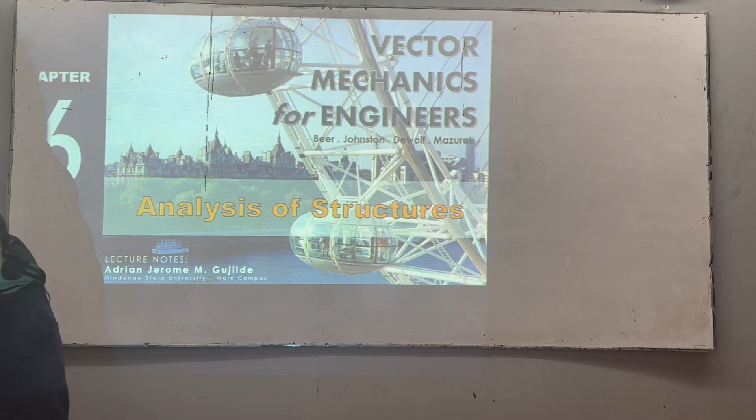So we have here analysis of structures. This is chapter 6, and for our next exam we have chapter 6 and chapter 7. This chapter is very short, with 3 topics. The content includes these sections: analysis of trusses, other truss analysis, frames, and machines. So basically this chapter is divided into 3 topics: trusses, machines, and frames.

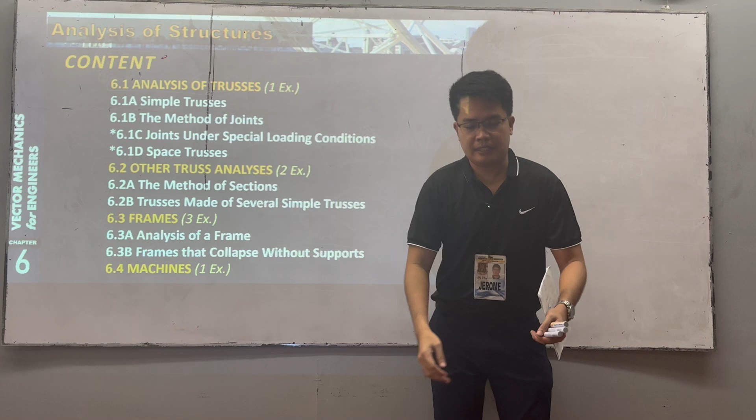For the first part, let's discuss trusses. So far, the chapters we've discussed previously only dealt with one system, which we considered as rigid, as one whole system. We didn't explode or separate it into parts. We considered it as one continuous system where we don't remove the parts.

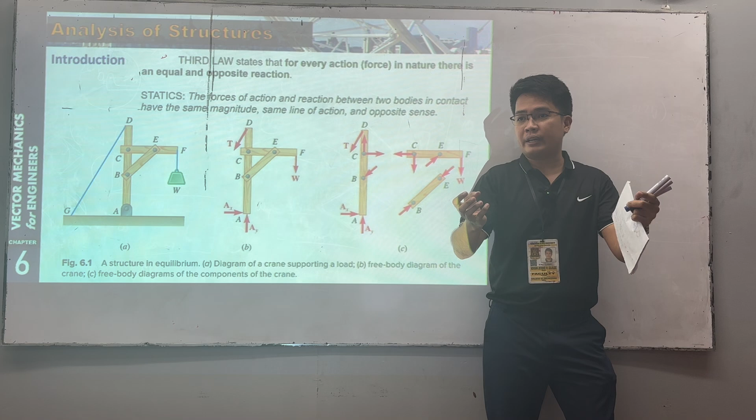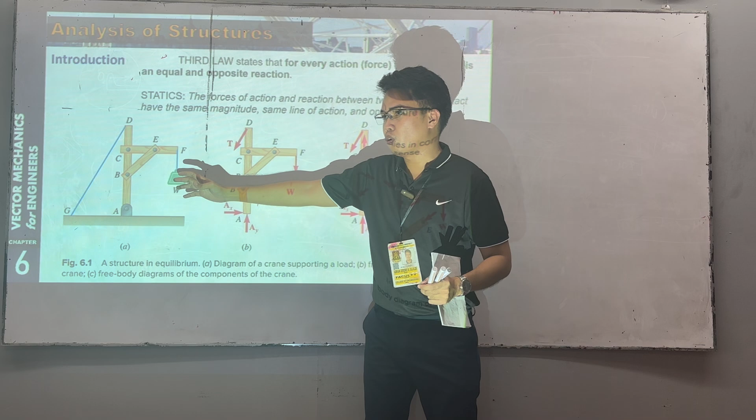For this chapter, analysis of structures, we will remove the parts of the structure. For example, in previous chapters, what we got was maybe the tension, the reactions, or the weight. But now, for analysis of structures, what we'll do is explode the structure, so the image will look like this.

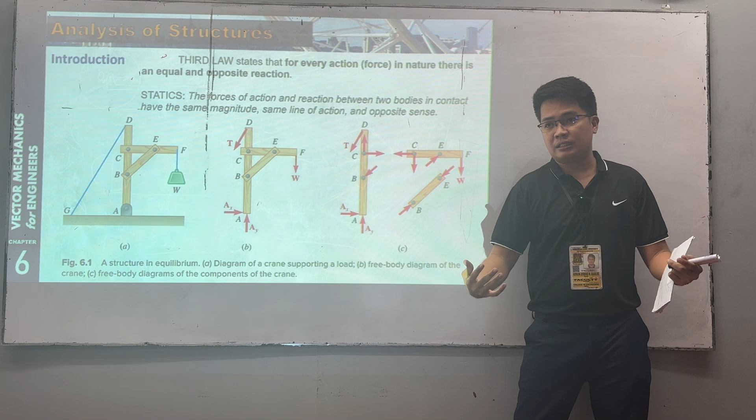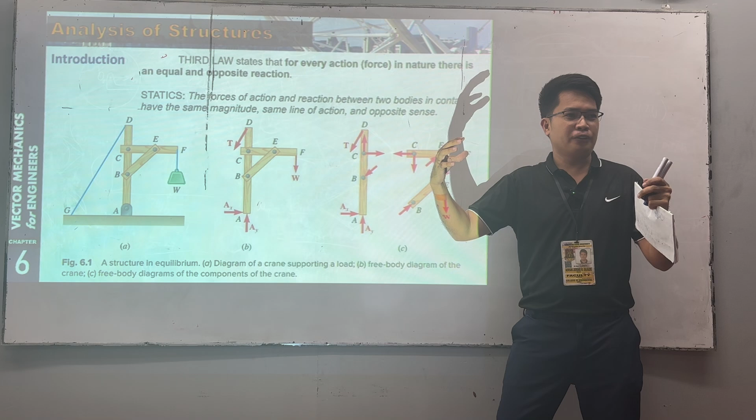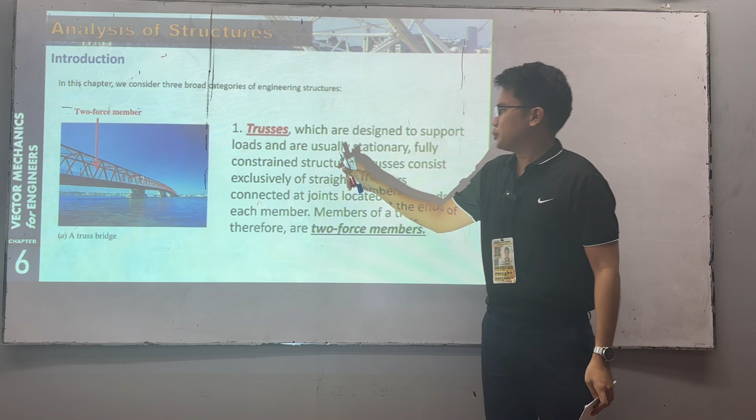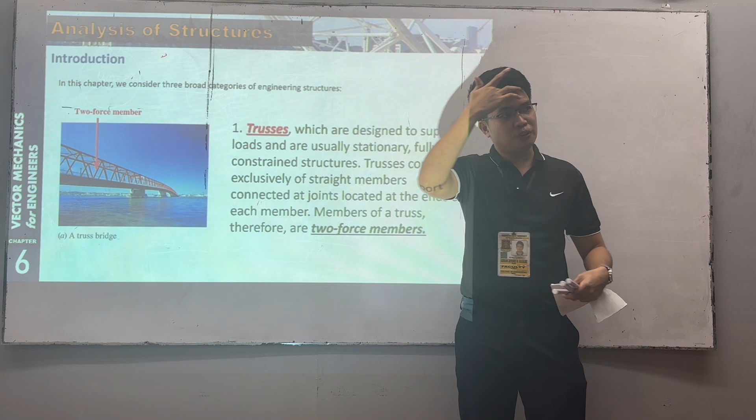We have trusses, which are designed to support loads and are usually stationary, fully constrained structures. Trusses consist exclusively of straight members connected at joints located at the ends of each member. Members of the truss, therefore, are two-force members. So our truss is a structure made of two-force members. If you remember, from before, what was our definition of a two-force member?

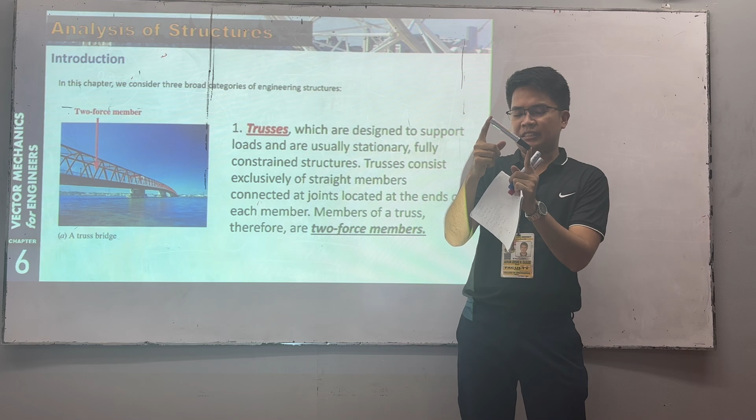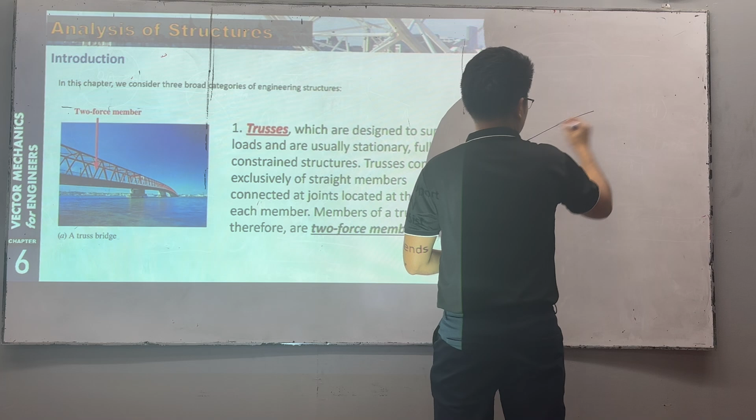A two-force member is a structure wherein only two forces are applied to it, and those forces are applied at the ends. For example, here, I placed a force going that way, and let's say another going that way. This structure is considered a two-force member because only two forces are applied to it.

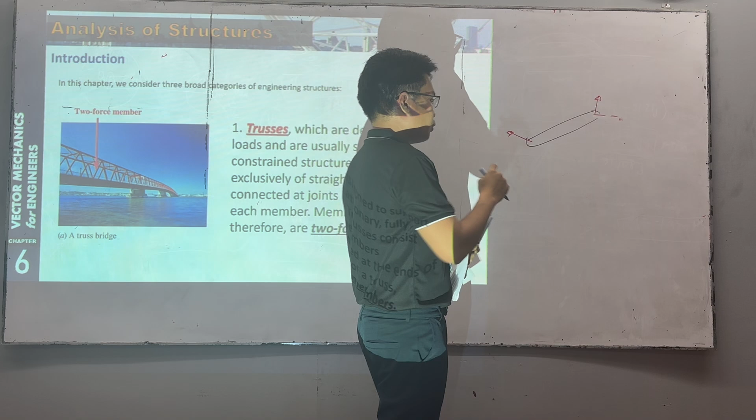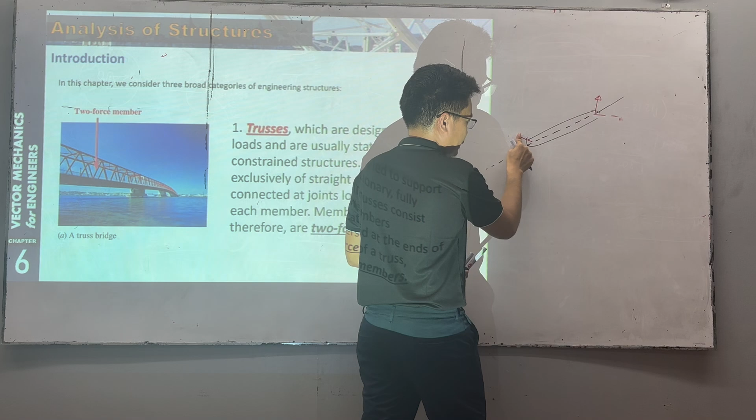The amazing thing about a two-force member is, if you have two forces applied at both ends, those forces should be opposite in direction and have the same magnitude. So this is wrong. The force applied should not be directed like this and like that. It should be this way and that way instead, the same magnitude but opposite in direction.

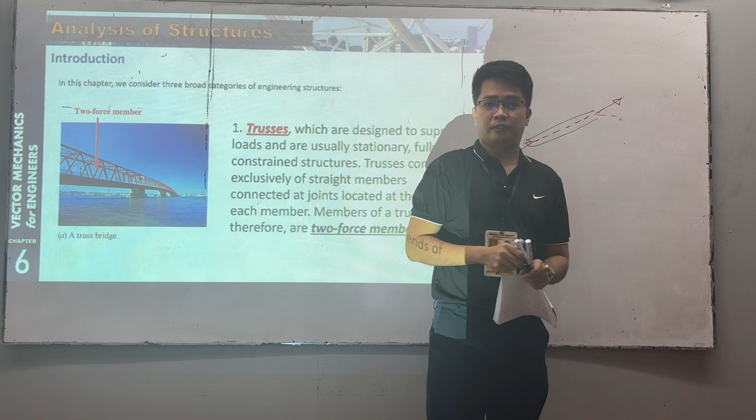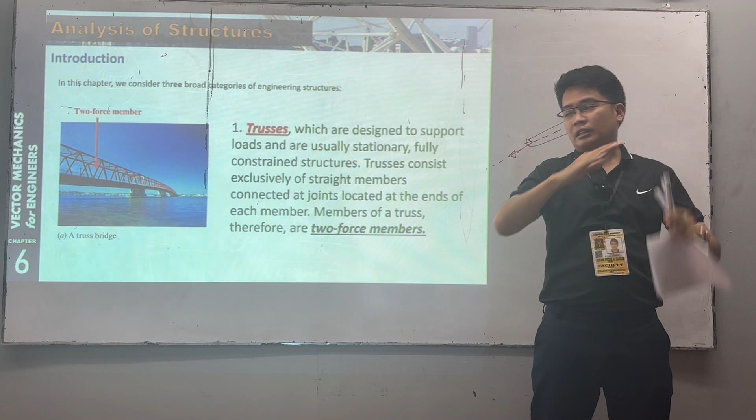So these members are what we use to create trusses. The bridges you see, the roofing you see, those are made of trusses. So again, what is a truss? A truss is a structure made of two-force members.

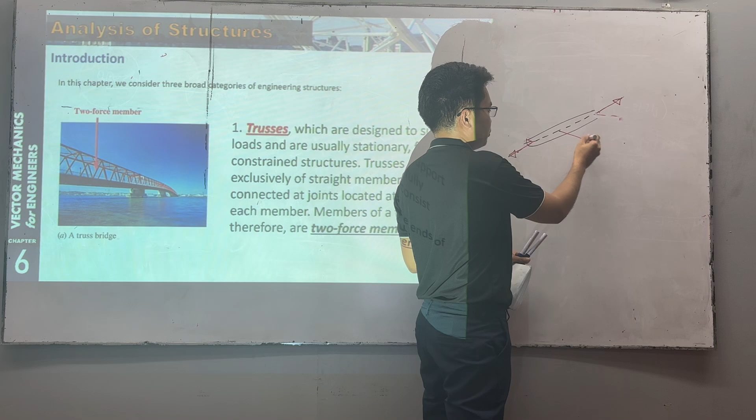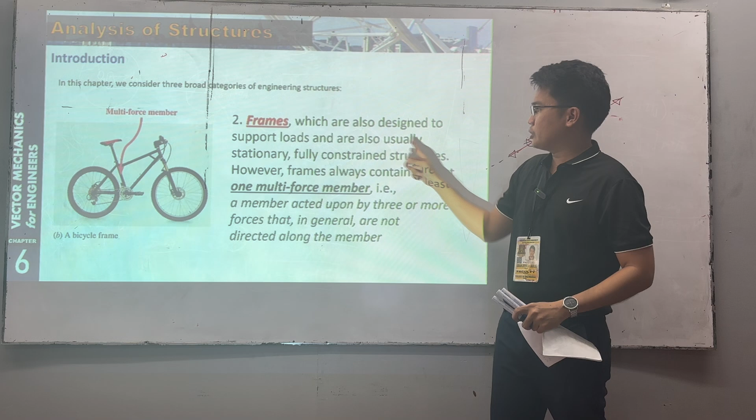Now, what if a structure has a member made of multiple forces instead of just two-force members? Let's say one member has a force applied to it like this. So what do we call that? We call that a frame. A frame is also designed to support loads and is also usually a stationary, fully constrained structure. However, frames always contain at least one multi-force member.

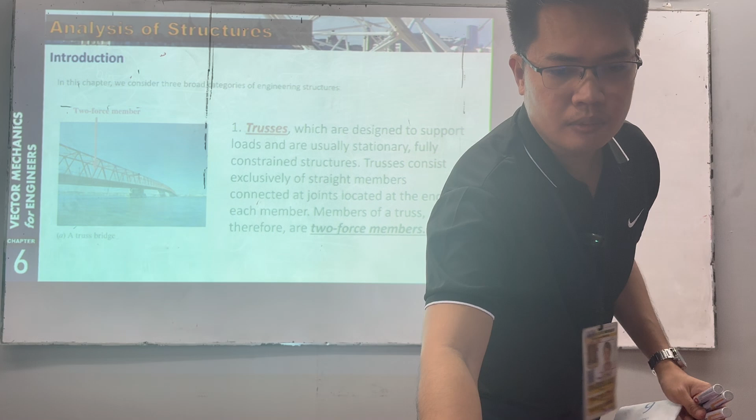For example, here, is this a frame or a truss? It's a frame, because we have a member here with a multi-force applied. So this one is a two-force member, but this one is a multi-force member. Therefore, this is a frame, and the analysis for a frame is different.

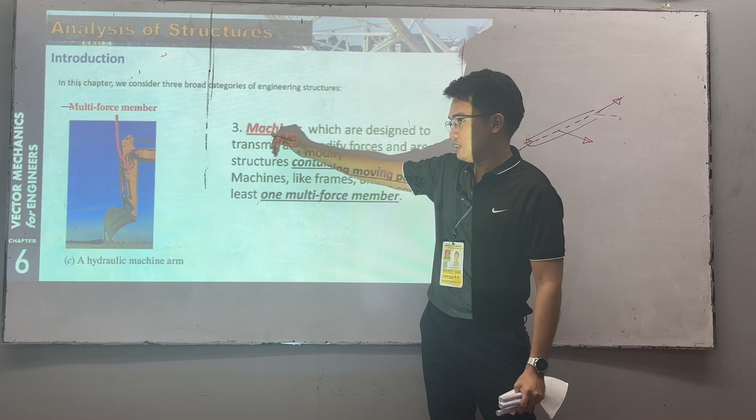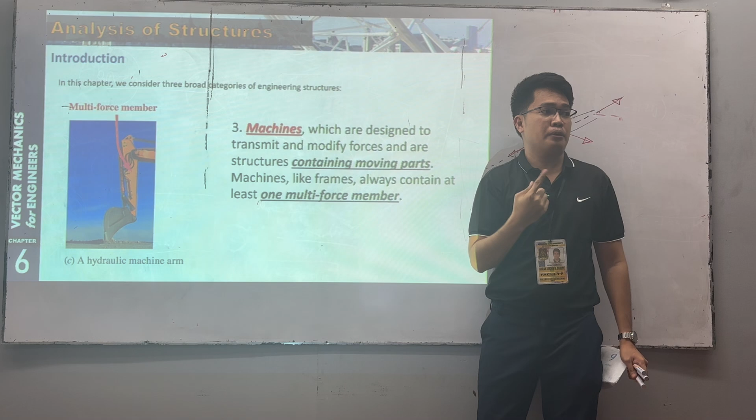Okay, so for the last part, we have machines. What's the difference between a machine and a frame? Machines and frames both have at least one multi-force member, same as a frame. But for a machine, it should be that at least one member is dynamic, or moving. Once there's a moving part, that's our machine — a simple definition of machine in our statics course.

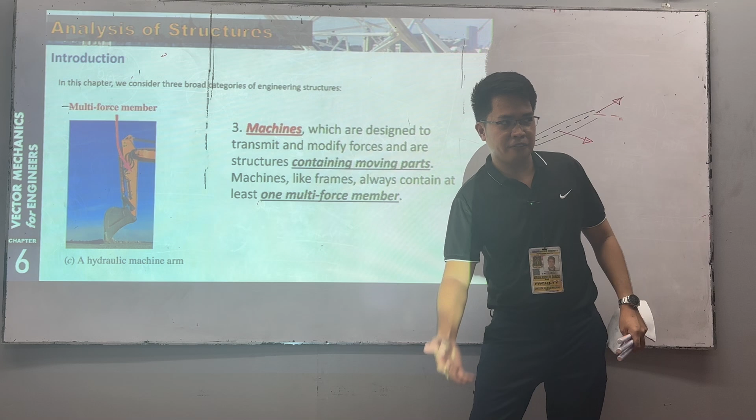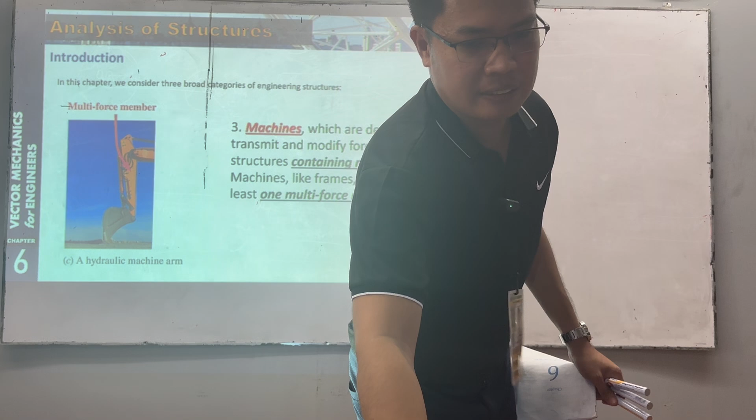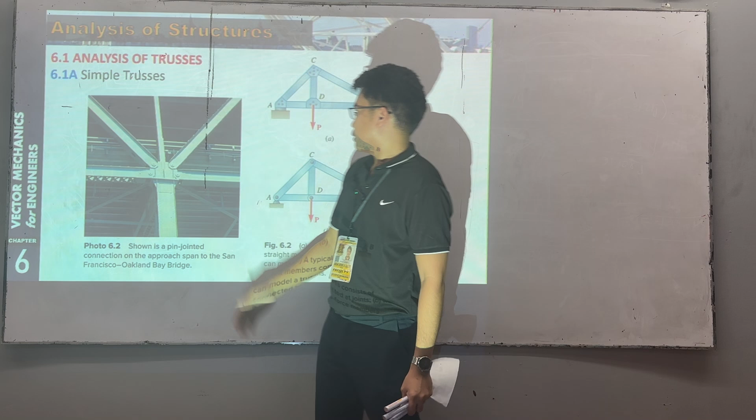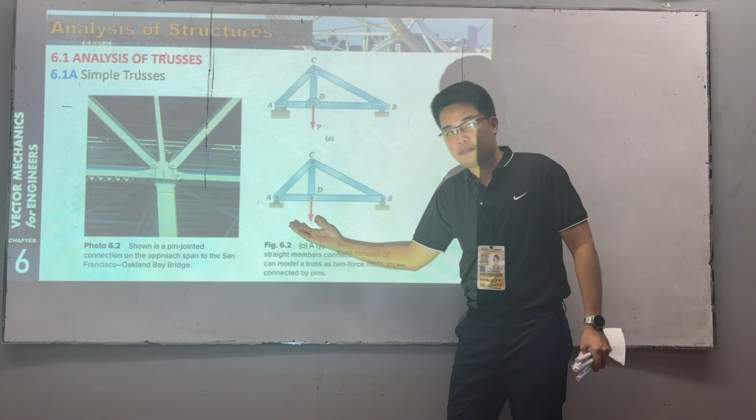One common application of trusses is our bridges. You can see in reality, these are connected by bolts or pins. If we draw this figure, we can simplify it into this one. The bolts and pins used here, we can simplify as one joint. But in ENS 164, our analysis is different. Since we're in 161, we stay with this simplified form.

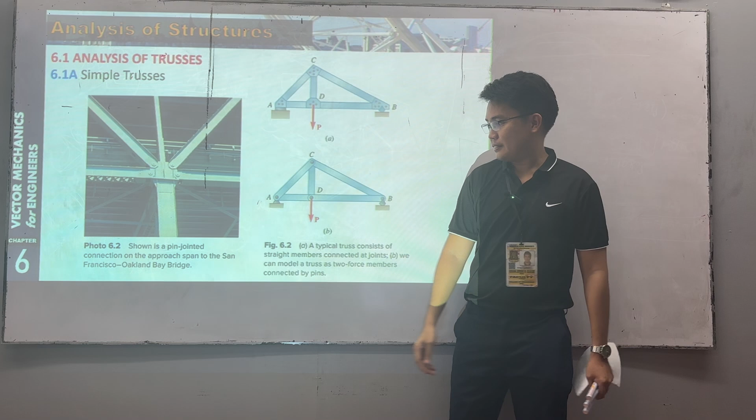So is this a frame or a truss? It's a truss, because it has no multi-force member. If this were continuous, it would be a frame, but it's not continuous, it's connected here. So it's a truss.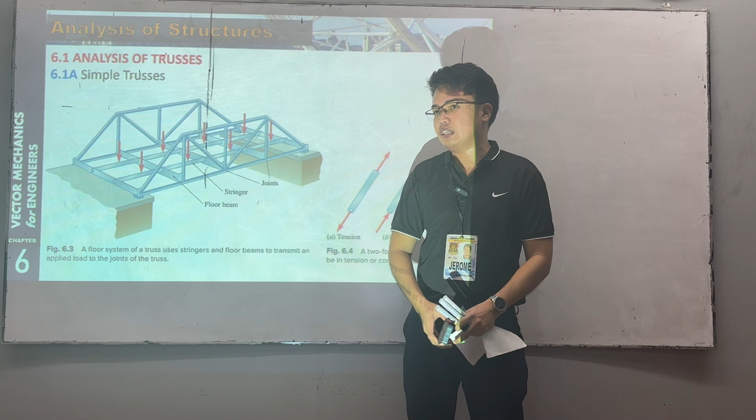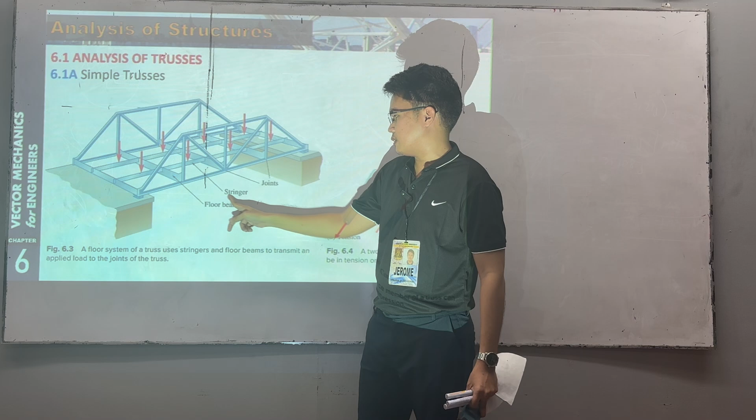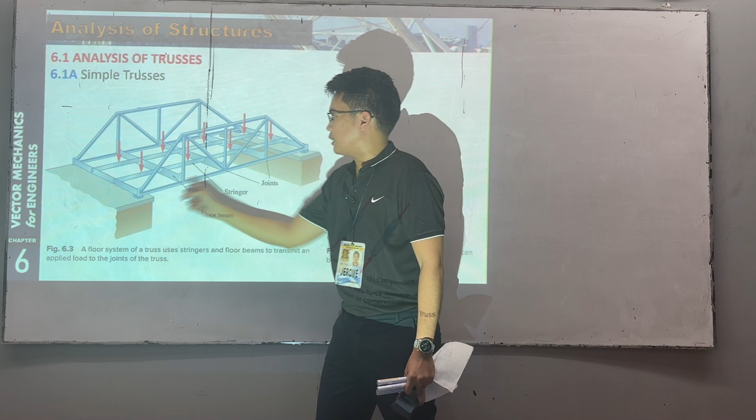For example, we have a bridge here, or a flooring. In the flooring, our trusses are on the sides, and in between we have floor beams and stringers. Their purpose is to distribute the forces and transfer them to the joints of the trusses. Once transferred, we can analyze the trusses to see if they will fail or not.

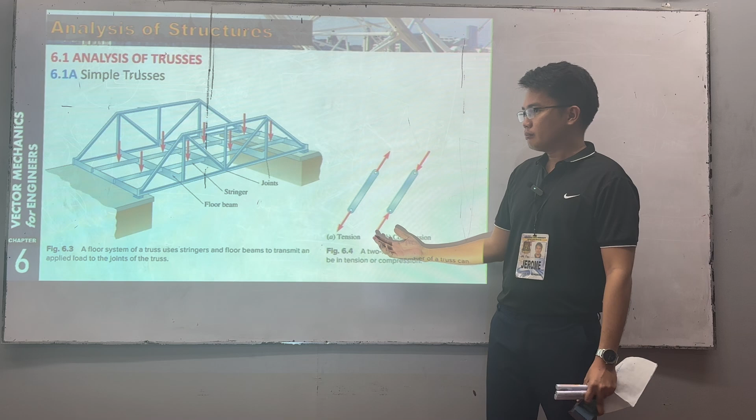Now, our convention here: for a two-force member, if the member is in tension, meaning it stretches, the direction of the force is away from the joint. If it's in compression, the force points toward the joint. That's just our convention.

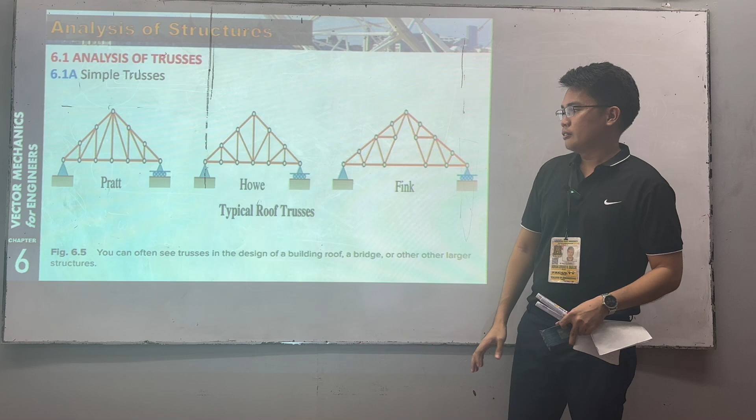Now we have these examples, applications of trusses. One is for roof trusses - we have a Pratt, a Howe, and a Fink. In our houses, these are the structures we typically use for roof trusses.

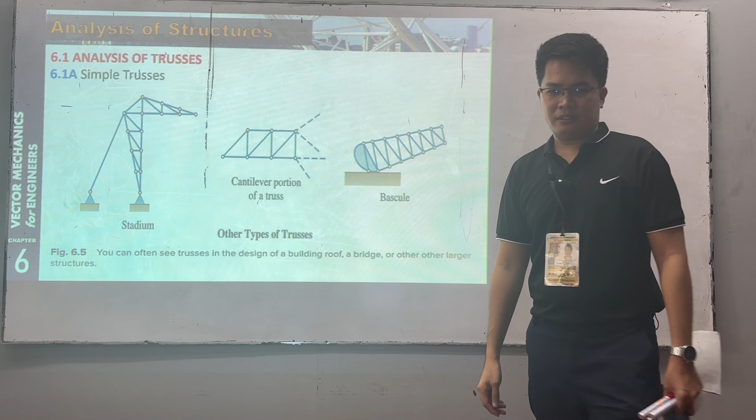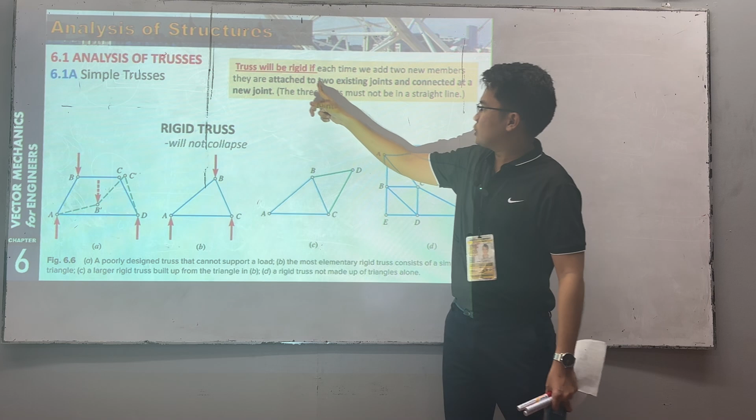Now we have a simple truss. What's here? A truss will be rigid if each time we add two new members, they are attached to two existing joints and connected at a new joint. The three joints must not be in a straight line.

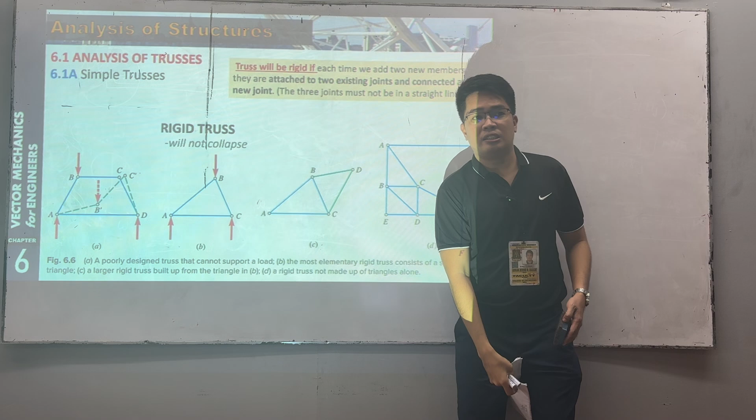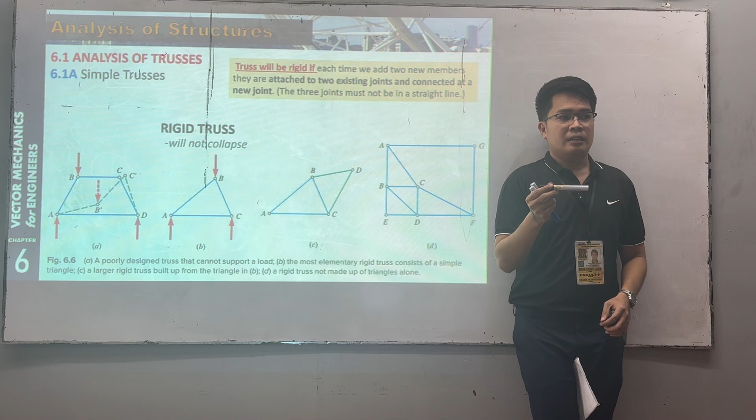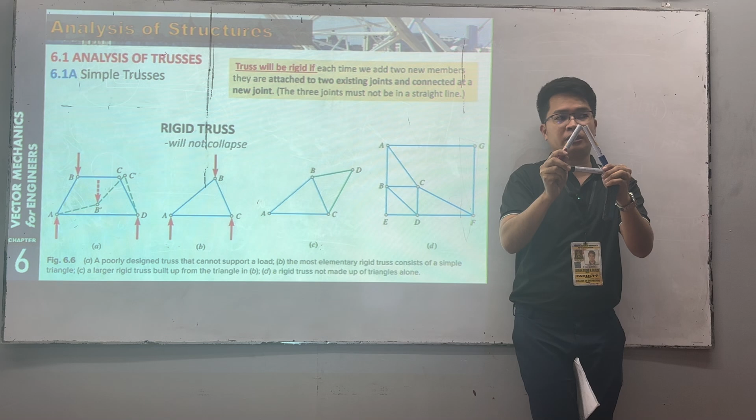So what are the existing joints here? This one and this one. So we connect the two existing joints, and then connect to form one new joint - this is our new joint. If you repeat this process, your truss structure will be rigid and won't collapse.

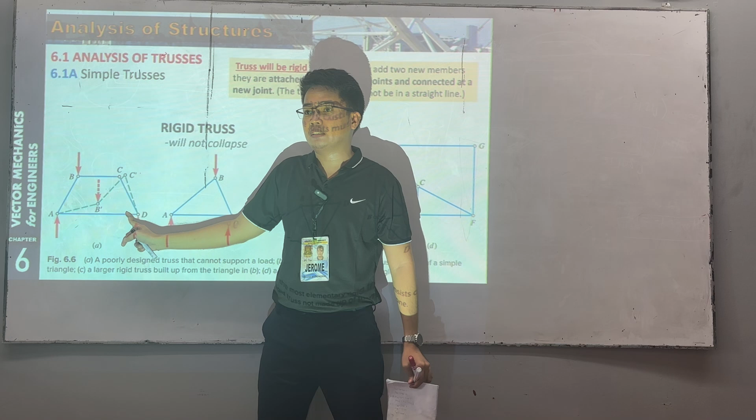So here's a triangle - you keep adding onto it, and the structure won't collapse. But if you build it like this instead, with a member here, two new members, and then another member, it doesn't follow the rule anymore. This kind of truss will definitely collapse - you can see it from the figure itself.

So now you have an idea how to build a bridge using trusses. It's not always a triangle that gets connected. For example, letter D here is not a triangle, but it's still considered a rigid truss. It started as a triangle here, connected here, then connected here, and these are the existing joints.

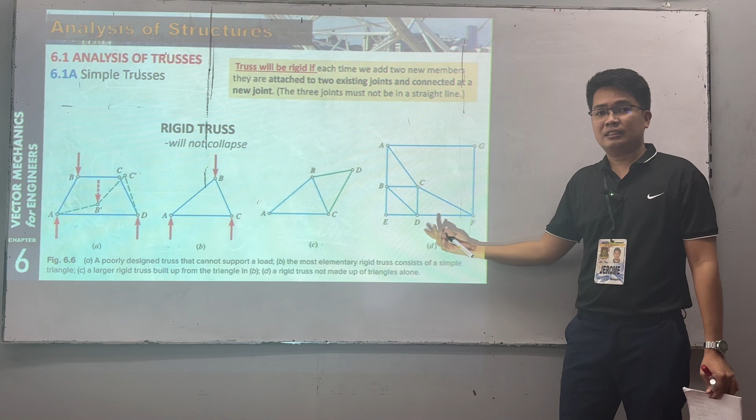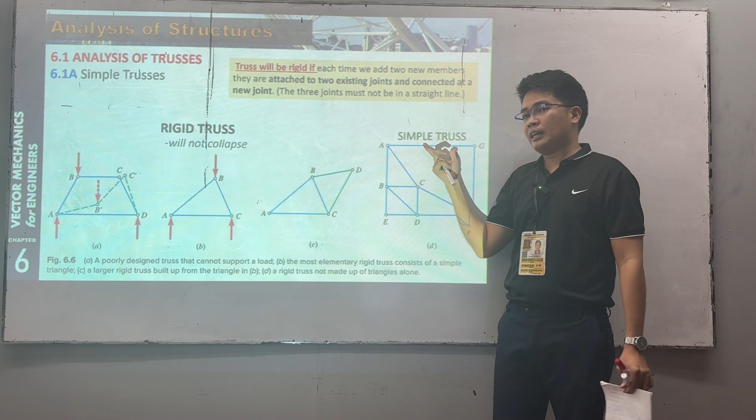And then the new members here are connected to the new joint. So it still follows the rule - it's not a triangle here, but this is still considered a rigid truss. Clear? So if you build your trusses in this manner following the instructions, that's what we call a simple truss.

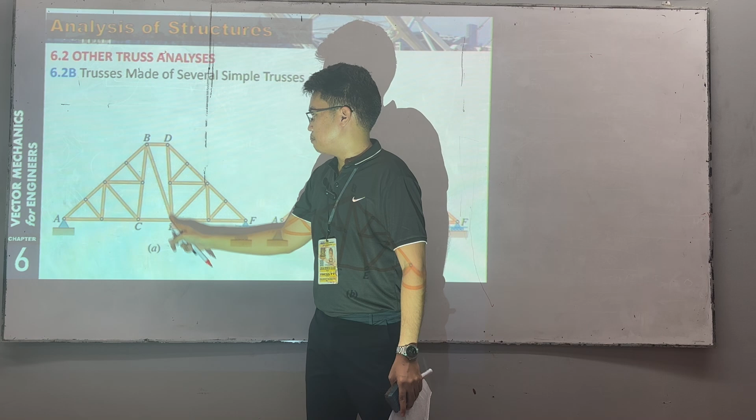Now we also have a compound truss. What is this? A compound truss is made of combinations of simple trusses. Here we have simple truss ACB, and also simple truss EFD. I combined them using the segments CE, BE, and BD. So this is a compound truss - it's a combination of simple trusses.

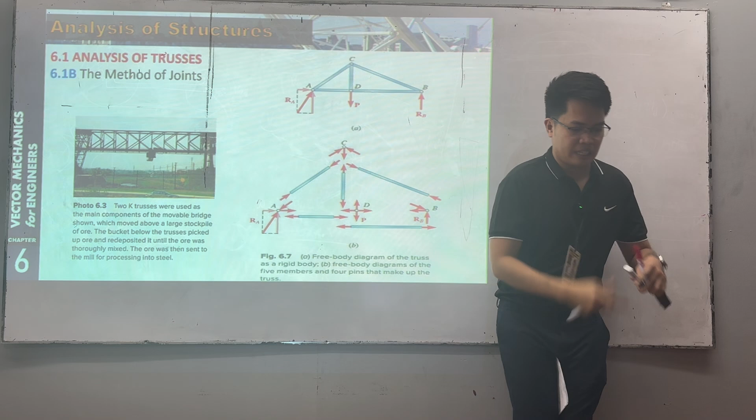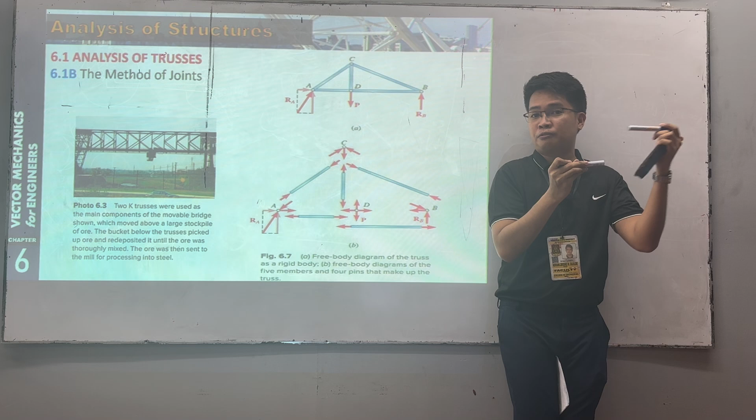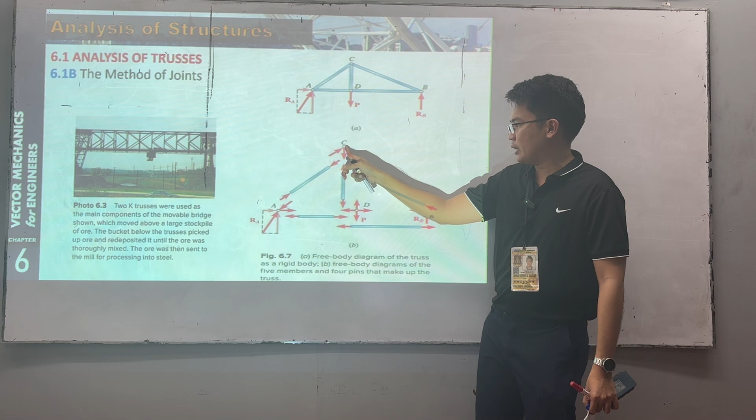Ano yung sabi ng third law ni Newton? Kapag ito siya nagpupush papunta doon, ito also will exert the same amount of force but opposite in direction. No? The same as with our joints here. So kung itong joints natin nakaka-experience ng compression papunta doon, so this joint here also is exerting a compressive force sa member na to. So kung ito in tension, ito din in tension. Kung ito in compression, this one here should be in compression, yung joint natin dito.

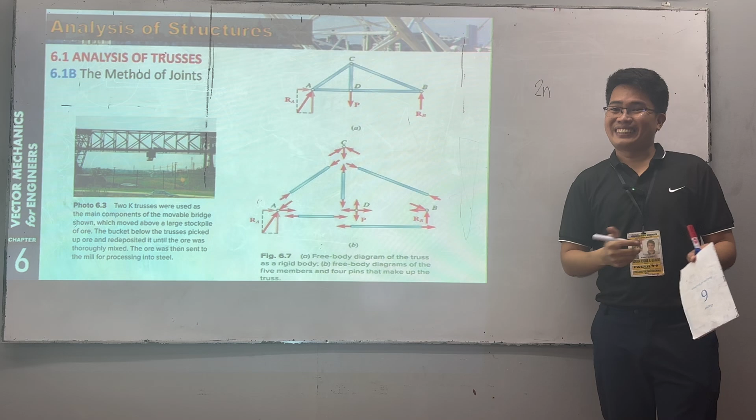Now, kung i-analyze natin yung joint na to, ano yung mga equilibrium equations na pwede natin gamitin dito at this point? Point lang naman yan. We have summation of forces along X and summation of forces along Y lang, di ba? Wala nang ibang equation. So, we have two equations. So, at every joint, ilang equations yung pwede mong gamitin? Dalawa, di ba? Now, if we have 1, 2, 3, 4 joints, so ilang equations meron tayo? We have 8 kasi 4 times 2. So therefore, the number of equations that we can use to analyze this structure here is just 2 times n. Tama?

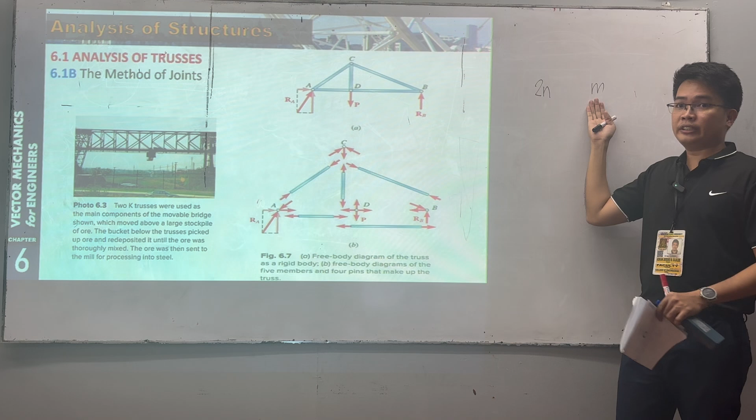We have here the number of equations that we can use. Ano yung mga gusto nating hanapin? We want to know the internal forces na nararamdaman ng every member. So ito, one member, one member, one member. How many members do we have? 1, 2, 3, 4, 5. Sabihin natin that that member is M. So, ito mga nararamdaman niya dito, tag-iisang internal force yan. So, ilang internal force yung kailangan nating hanapin? We have 5, or M internal forces. And then, meron pa tayong unknowns dito na structure, yung reactions. Diba?

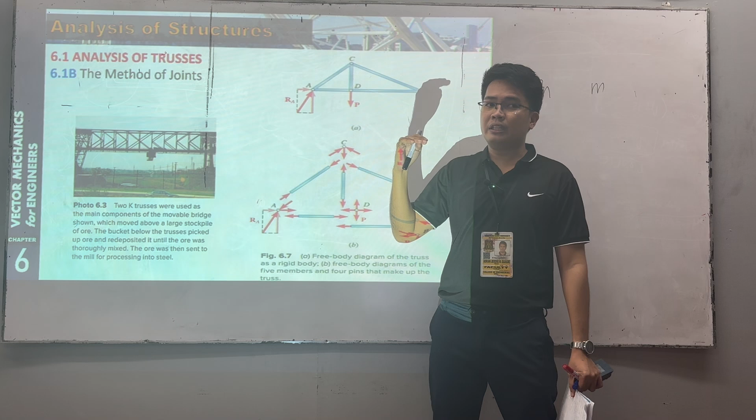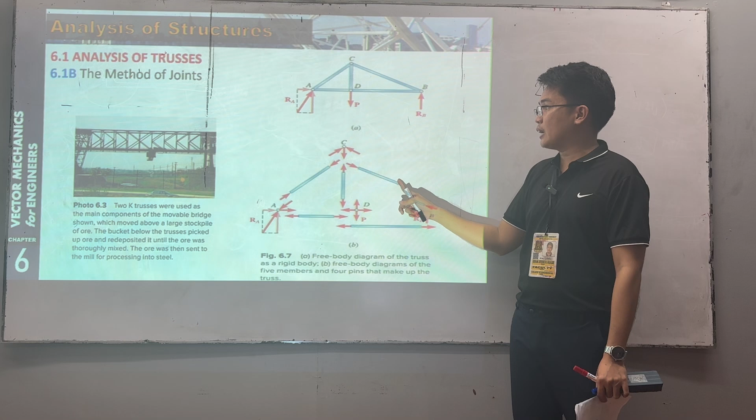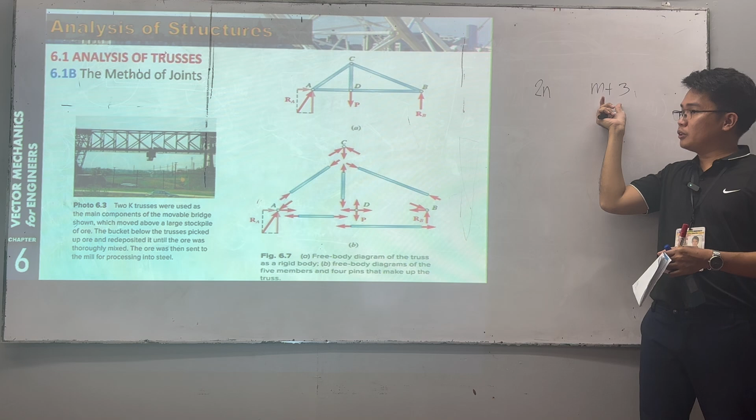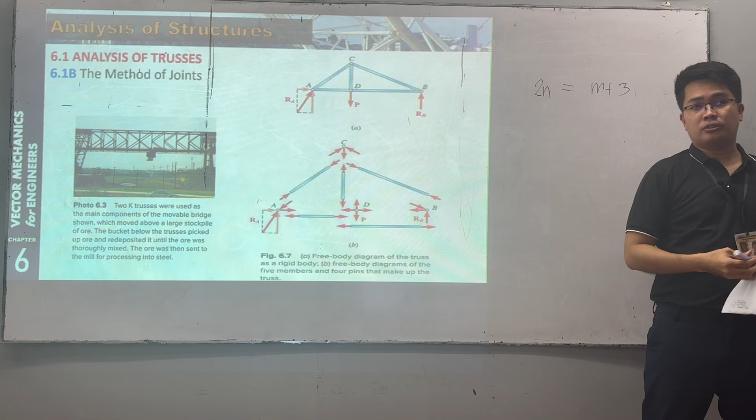Diba karamihan sa mga tulay, sa mga roofing natin is a combination of a pin and a roller supports. So sa pin, we have X and Y component, unknown yan. So plus 2 yung unknown. And then we have another unknown here sa roller natin. So tatlo na. So how many unknowns do we have? 1, 2, 3, 4, 5 plus 2 plus 1. So we have M plus 3. So ito yung number of unknowns and ito yung number of equations. In order for our structure to be solvable, the number of equations should be equal to the number of unknowns. If ito masatisfy natin, the structure is solvable.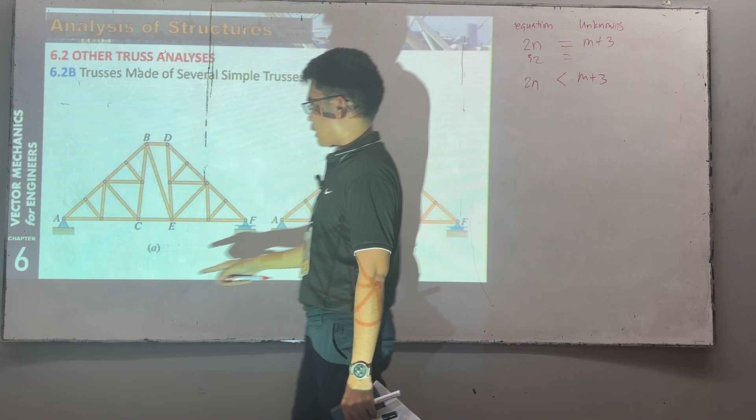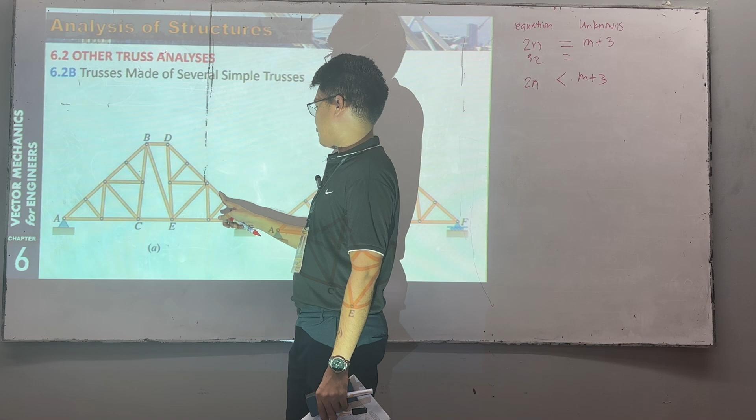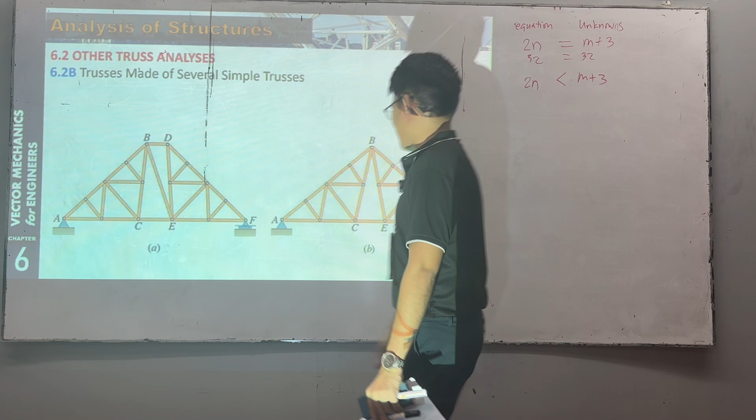So what if the number of unknowns is greater than the number of equations? Kailan magiging greater yung number of unknowns? Kung titignan nyo dito, we have equations 2 times n. So, ilang n to? We have 1 up to 16. So, 16 times 2, we have 32. And then, ilang members meron tayo? 1 up to 29. Plus 3, 32. So, this one here is statically determinate. How about this one?

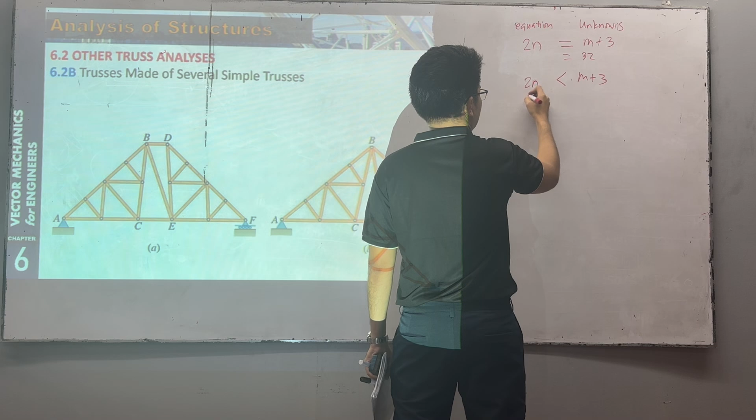Ilang members yung binawas natin? 1, 2. We have 2 members binawas natin dito. Mag-equal pa ba? So, ano yung mas greater? This part here or this part here? Binawasan natin ng dalawang members. And then, sa pagbawas natin ng dalawang members, nabawas natin ng isang joint, kasi kinonect natin dito. So, this one here becomes 30, and then this one here minus 2, we have 30. Equal pa rin.

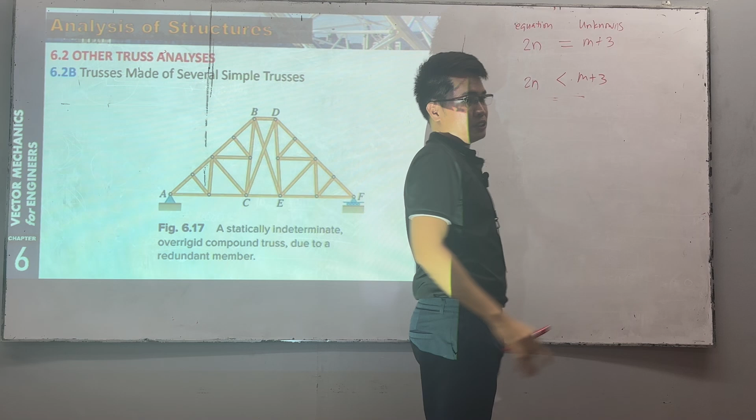So, yung point lang dito is, if the number of unknowns is greater than the number of equations, this one here is called overrigid. These are overrigid structures. Example nito is itong figure natin dito. Kung bibilangin mo yung number of joints and number of members, i-substitute mo dito, makaka-come up ng itong expression na to, overrigid yan. So, that is statically indeterminate kapag overrigid.

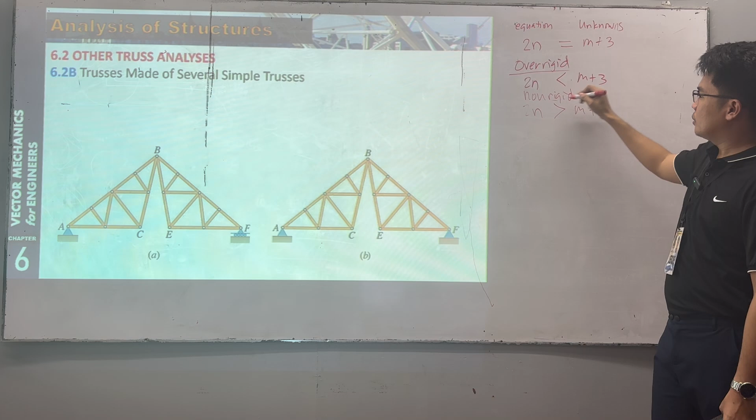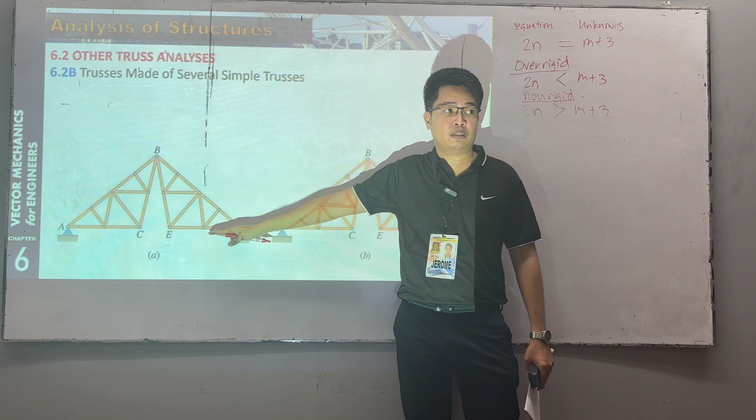So, we have also non-rigid. Kung non-rigid, baliktad, we have 2n is greater than m plus 3. This is non-rigid. Kung ito yung relationship nila, yung structure natin will collapse. So, importante that you know the number of members and the number of joints na gagamitin mo. Kasi kapag using this equation, non-rigid siya, ibig sabihin magko-collapse yung ginawa mo. So, ayan lang.